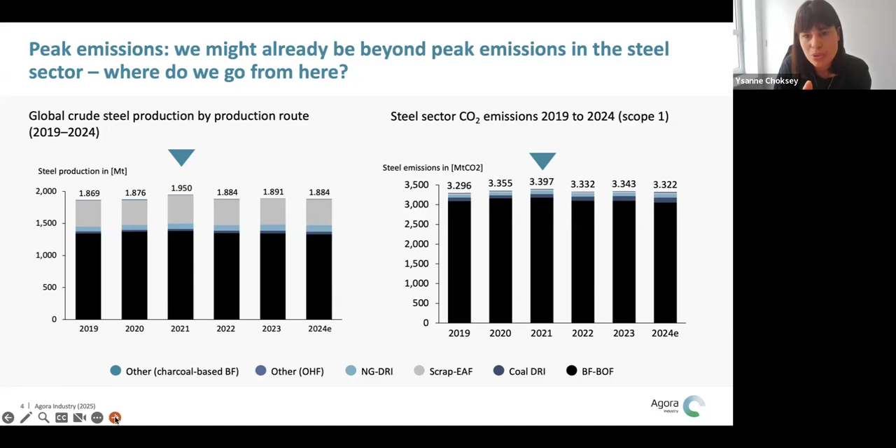Next slide, please. Looking forward, though, to 2030, we do see changes in the types of technologies that are used to produce steel. So this would mean production swaps and capacity swaps and switching over from very high CO2 intensity to lower CO2 intensity ways of making steel by 2030. And overall, we see this switch, meaning that there is an estimated 5% reduction by 2030. So how is that happening?

Firstly, if we look into the activity change in China, we see blast furnace capacity going down by around 100 million tons of production by 2030. However, that is almost completely eradicated by the fact that we see capacity increases in blast furnaces in India, coal-based DRI in India, and also blast furnace capacity in Southeast Asia as well.

We do see some switching over to scrap-based EAF of minus 50 million tons, so switching from blast furnace over to scrap-based EAF. And we also see switches to lower carbon iron making as well. So natural gas-based DRI plus EAF of 30 million tons, and natural gas to H2 DRI of 10 million tons, and then H2 DRI straight to H2 of 10 million tons as well. So around 100 million tons of lower carbon steel, resulting in around a 5% decrease in emissions. But that is nowhere near where we need to be.

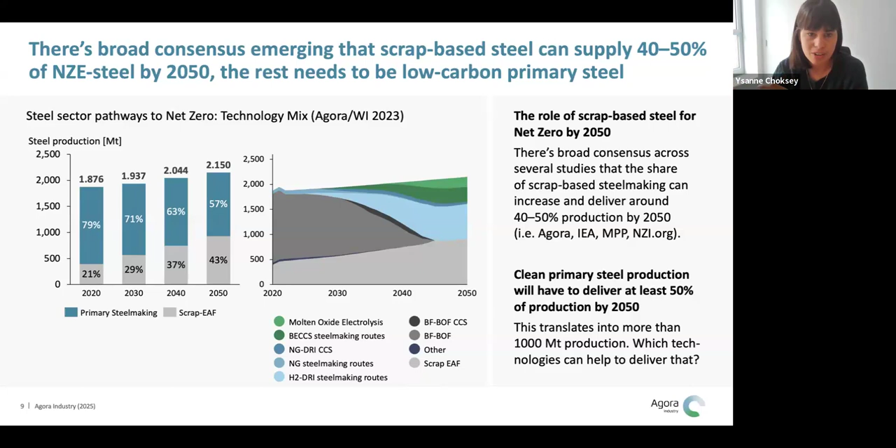So blast furnace with post-combustion CCS, we see as not playing any kind of a major role in net zero by 2050. Part of the reason that we look to historically is the fact that steel companies don't believe it will play a major role, because when they are pushed to make decisions based on a carbon price or based on the end of free allowances of that carbon price, they are not investing in CCS. They are investing instead in DRI, because they seem to be banking on DRI as being the game changer when it comes to decarbonizing primary steel. So that's one of the reasons.

We do broaden that analysis as well in the briefing paper that we're currently writing to accompany this analysis. We broaden that to look at also the cost inefficiencies of CCS on a blast furnace, and also the difficulty of actually capturing that amount of CO2 as well, and the difficulty with also the range of capture points that you have on an integrated blast furnace. Next slide, please.

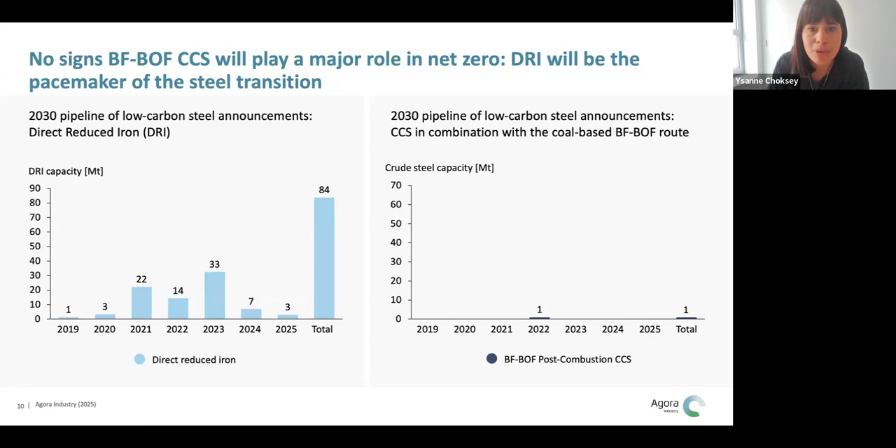So having said that, DRI will be the major game changer in terms of technology to deliver us a decarbonized primary steel sector by 2050. We wanted to look at where the project pipeline is at the moment. So around 84 million tons of low carbon DRI projects have been announced over the past few years.

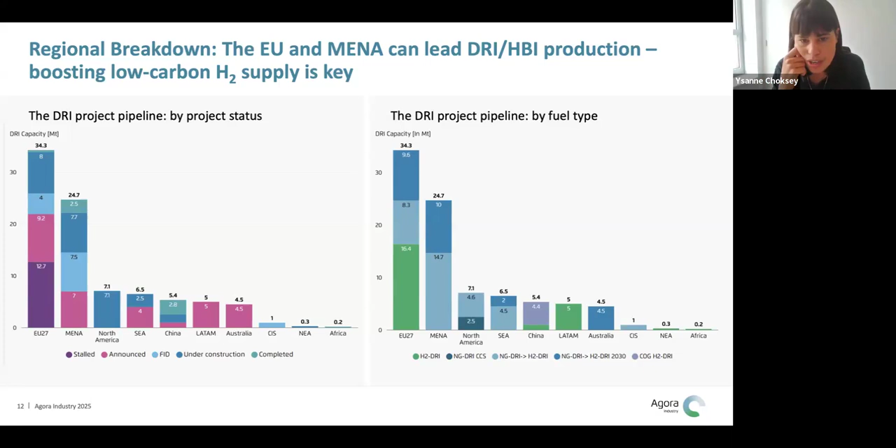Next slide, please. So this is really trying to problematize staying at a halfway transition. So we do not advocate for new gas infrastructure, for instance, to be built up around DRI plants. And we also see the problem of DRI staying dependent on gas for much longer than the original planned exit dates were.

We do not want to see DRI being dependent on gas up until 2050 because really it's only delivering 50% of emissions at best. And that's when you have really immaculate extraction and also transportation of natural gas from extraction point over to use point as well. So the essential thing is what we're trying to say is we don't want to stop at a halfway transition.

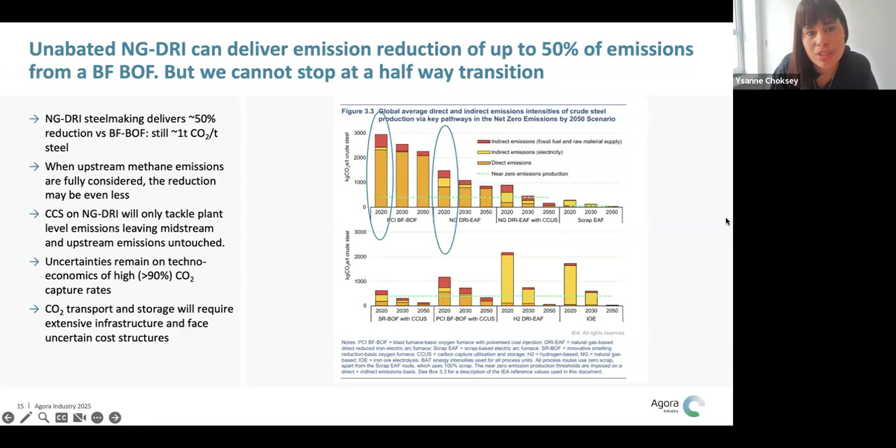Next slide, please. But that means we need hydrogen. So hydrogen uptake is at risk without clear policy signals to allow iron and steel makers to fully transition to H2-based steelmaking. Next slide, please. So how do we unlock that hydrogen? And also how do we build out the renewables capacity to fuel it?

Next slide, please. So decarbonizing steel and putting it all on hydrogen will require huge amounts of new renewables resources to be built out. So around 1,000 million tons of DRI based on hydrogen will require just under 50 million tons of hydrogen consumption. And that will result in just under 3,000 terawatt hours of new renewables electricity that will be needed to support that hydrogen-based DRI infrastructure.

So what we're trying to really say in this analysis is also that we need to think about rapid clean-steel deployment of renewable electricity, grids, and H2 infrastructure for production, transport, and storage as well. And noting that these supporting infrastructures have very long lead times and need to be coordinated at an early stage, and planning is absolutely essential. And then reiterating that natural gas-based DRI production needs to have a clear pathway to access renewables and clean H2 to avoid stalling at a 50% transition.

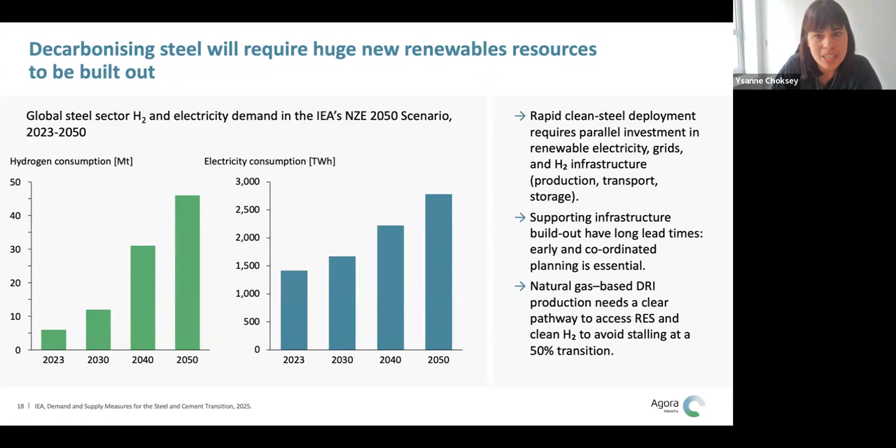Next slide, please. So where is the H2 project pipeline at the moment? So what we see is that we're not lacking in announcements. As we saw before, we'll need around 50 million tons of clean hydrogen in order to decarbonize steel completely by 2050. There's a project pipeline of 26 million tons of clean H2 already in the works globally. So we don't need so many more projects. What we need is to move those projects from announcement into FID. And you can see that that is really low when it comes to actually transforming these from just announcements to FID. And why is that?

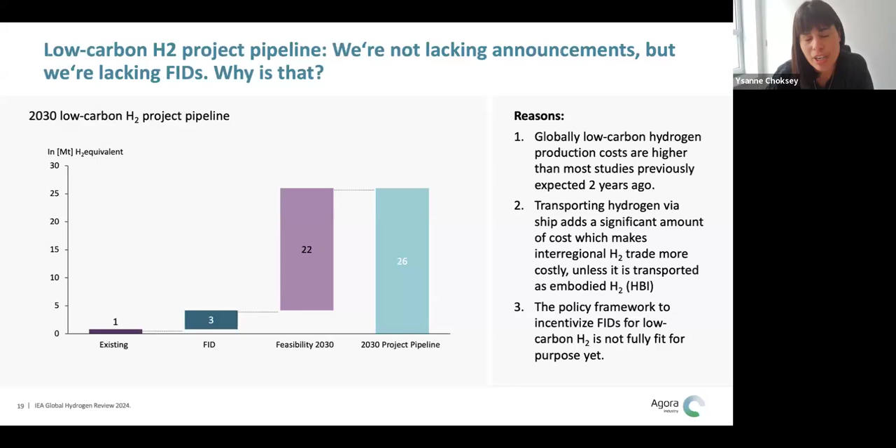It's partly because low carbon hydrogen costs have been higher than most studies previously expected 2 years ago. Transportation of hydrogen via ships in gas form or in liquid form seems to be very difficult and actually seems to be totally unfeasible, which means that people are starting to look down the value chain. For instance, at Agora, we have a green iron trade project where we're thinking about embodied hydrogen in the form of HBI being transported as green iron. And then also, lastly, the policy framework to incentivize FIDs for low carbon H2 has not been fully fit for purpose yet. Next slide, please.

So what we see is that steel can be an off-taker and can actually drive demand for low carbon hydrogen. So the idea with this slide is to show that 39 million tons of H2 DRI projects could deliver an off-take of around 1.9 million tons of H2, which means that if they were attached to the DRI projects, they could essentially become a very useful off-taker and drive forward those FID decisions that are so badly needed in the hydrogen sector.

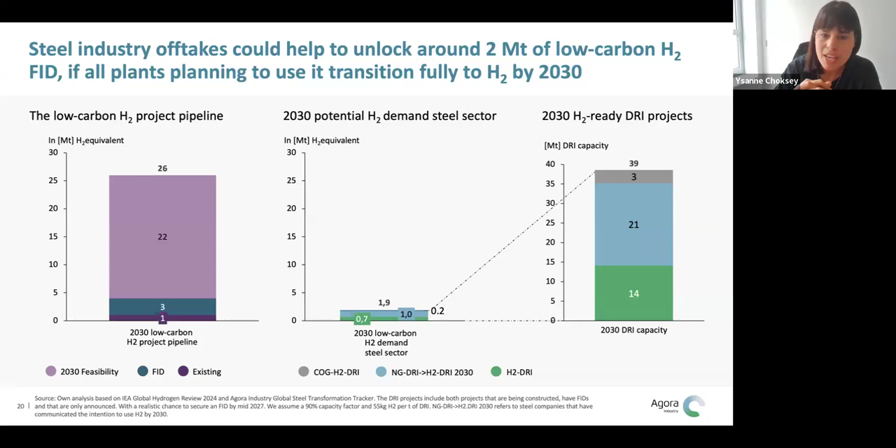So what are the bottlenecks? Next slide, please. Well, firstly, it's a big task to build out this much DRI. By the 2040s, we're going to need around 50 million tons of new capacity per year. So in 2026 to 2030, we want 10 million tons a year. By the 2030s, we're talking about 30 million tons a year. End of the 2030s, 40 million tons a year. But by the 2040s, we're talking about the need to build out 50 million tons a year. This kind of capacity build out has been seen before, as you can imagine, in China. Not with DRI, but with BF-BOF.

At the beginning of the century, China was building out around 100 million tons of new blast furnace capacity every single year. But we do see this as a potential bottleneck, as there are limited companies that provide the technology for DRI, and there is also limited capacity for those technology companies to deliver multiple projects per year. So we see that as a potential bottleneck going forward into the future.

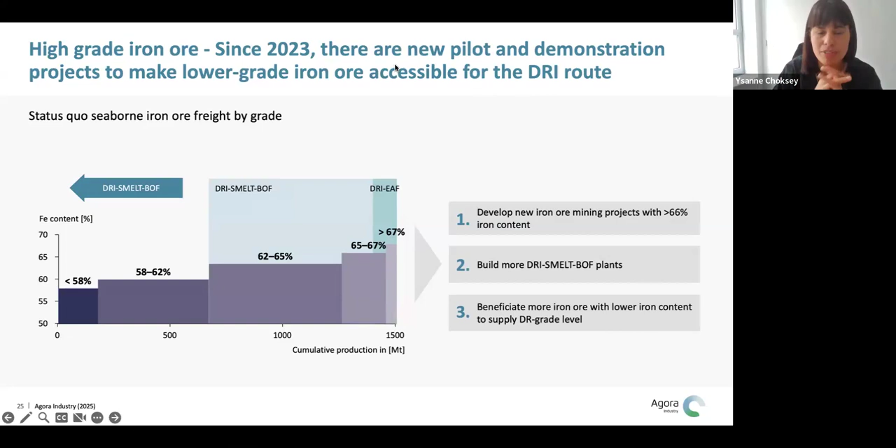We also see the opening up of new mining projects like Simandou that is delivering higher than 66% iron content in iron ore as well. So we don't see it as too much of a bottleneck, even though currently, strictly speaking, DRI grade iron ore is traded at around 4% of the iron ore market globally. Next slide, please.

So what we're going to need is a global large-scale uptake of DRI-based steelmaking, and it requires a concerted effort across the entire technology supply chain, from technology providers and engineering firms to steelmakers and investors, to rapidly expand annual DRI construction capacity and deployment to around 50 million tons a year by the 2040s. Next slide, please. So what is that policy mix and international collaboration?

Next slide, please. So we're looking at an entire value chain approach, which is why we have upstream, midstream, and downstream. So you need to build up the clean energy and raw material supply. In the midstream, you need climate-friendly production processes. So that's project support for those DRIs. And we're also thinking about downstream, adding more to the demand sector, so making sure that the demand is there for those goods. Underpinning it all are enablers like finance, policy coordination, trade and technology partnerships, skilling and reskilling of workers.

And I think ultimately you also have this underpinning. We've put it in the midstream section here, but we could put it in all of the sections, and actually in the briefing paper it comes as the underpinning policy of it all: a carbon price. Without a carbon price, you're really not going to close the cost gap enough, and you're going to become far too reliant on subsidies, and subsidies are not going to be politically viable at all periods. So you need to make sure that you have a carbon price to actually close the price gap between traditional coal-based steel and new hydrogen DRI-based steel.

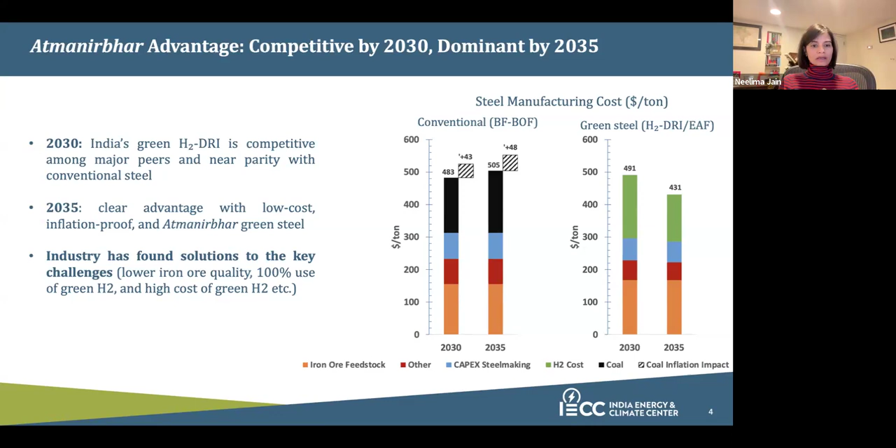Next slide, please. So what are the priority actions that we need to undertake to make sure that the industry is able to achieve that scale? We think a procurement mandate would help. I do know that Steel Ministry had put together a procurement mandate and it was shot down by Department of Finance, but that shouldn't stop us as a community to continue to push forward, because Steel Ministry's own analysis shows that even a 20% share will result in less than 1% price uptick on infrastructure cost. And that's still within the contingency budget, right?

So I think as a community, we should continue to press on the procurement mandate, because the demand you can bank on for the first few plants. That's exactly why even the green ammonia prices came down so much, because there were bankable offtakes that the industry could rely on. And I think it could play the same for the green steel industry as well.

Now priority lending, ECB window, of course, I don't need to explain this, but I just want to tell you one data point that we came up with. Every 100 bips that is reduced on the cost of capital results in at least $18 reduction per ton on H2DRI steel. And that's a powerful number, right? So if we are able to secure these long tenure, low-cost loans for some of the new H2DRI plants, it would go a long way, at least in the first 3-4 years.